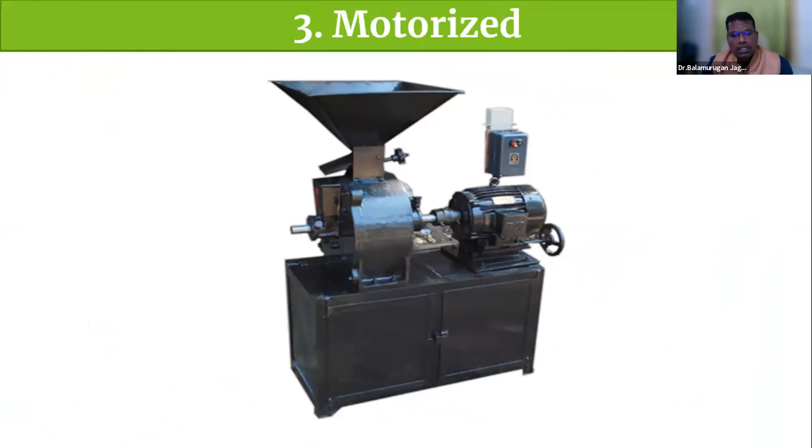So what is this? It was the earlier innovations and inventions that got attraction from common people to the modern world. This was updated with the wheel, which changed to slight automation, and going forward it was motorized. We could see that the process industry has made it possible to prepare chapatis or puris within seconds, and now full-time automation is possible.

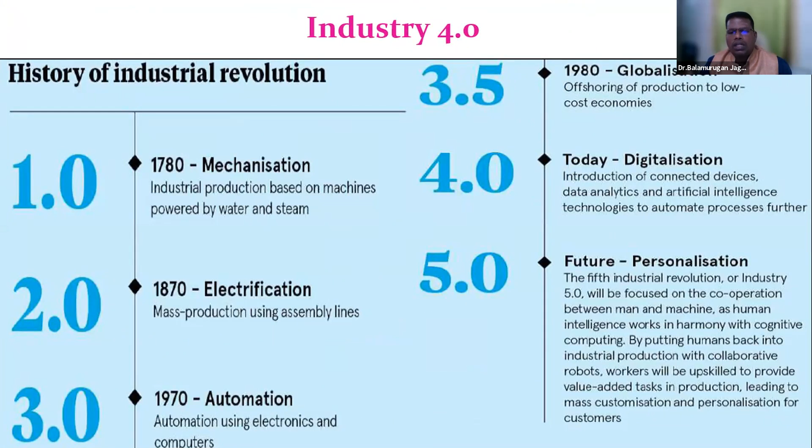Yes, it is about the history of the industrial revolution: 1.0, 2.0, 3.0, 3.5, 4.0, and now it's 5.0, which is about personalization. No more TV channels—it's about personal TV channels we have, as well as the mobile. So all the people talking around are talking only to their mobiles because they don't have friends or relatives, I don't know, but they are sitting alone in the park talking with the mobile.

That means automation. Automations can be done through a lot of steps, but there is a sustainable outcome which draws all the engineering platforms integrated to IoT. This is called the Internet of Things.

Technology-driven education—new technologies evolve at an exponential pace, and there is no historical precedent that marks the beginning of this evolution, hence being called disruptive technologies, which are ruling right now. I could see artificial intelligence, AI, robotics, Internet of Things, autonomous vehicles, bio and nanotechnology, 3D printing—all such information is top notch, yes, it is top notch. Every individual needs to have knowledge about this disruptive technology.

This is excellence in engineering. That brought about automation—what's the need for automation in an industry? Is there a need, or can I go ahead with ordinary machinery? Meaning, I could not compete with the common world.

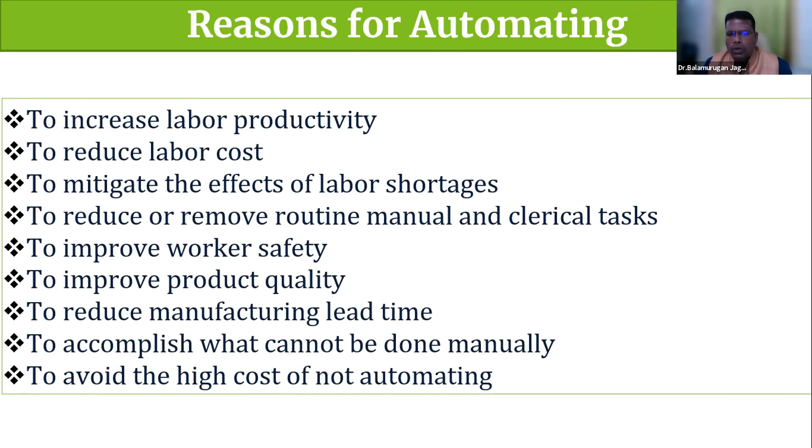Automation increases labor productivity, reduces labor cost, mitigates the effects of labor shortage, reduces or removes routine manual clerical jobs, improves worker safety, and improves product quality. All these add up to what needs to be done, and this can be achieved through a smart world.

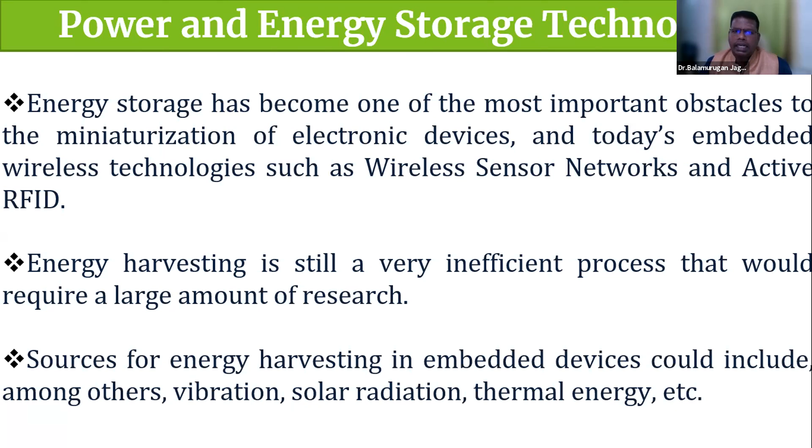A smart watch is there, smart operation is done, smart computer is there, smartphone is there. Why not the world can have all such things, meaning smart meters are going to come in electricity boards. You can switch on and switch off, and time-of-day meters are going to be integrated with smart metering. So all such things are going to be with IT and OT, information technology and operational technology, going to be integrated.

But we also have a thought process to do justice to the world, meaning we need to have a sustainable world, a green world. So whatever we are seeing, is it a myth or an illusion? We need to work on it. I will just think about it, and I'm here to talk about only the visualization part.

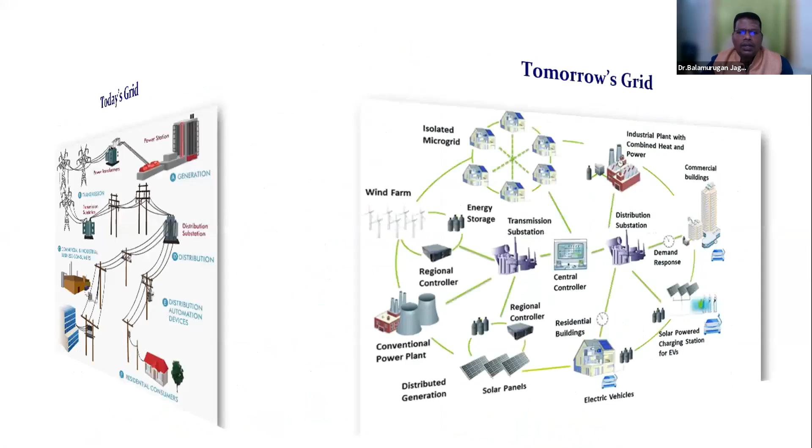Going forward, today's grid is a layer or linear integration, but tomorrow's grid is going to be an integrated outcome. That means the isolated world is going to be integrated with every part. Today we could see that no more electricity is being tapped from the grid, it is all self-generation, meaning every individual wants to generate their own.

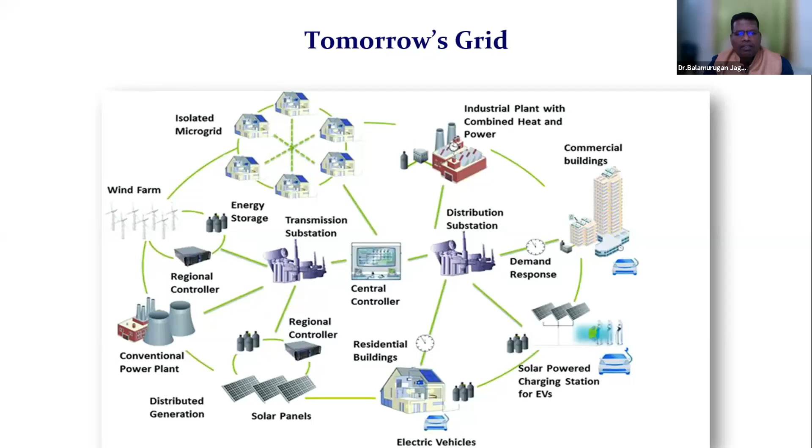And the power generation is also distributed. Earlier it was only with coal, and now we have all the alternatives. So a lot of energy is coming from different formations, but how it is being distributed is about energy conservation. One of our co-panelists has vast experience explaining about it.

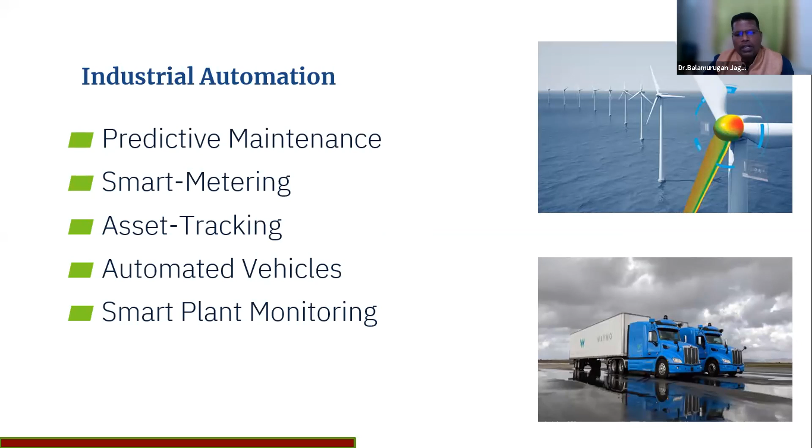So we'll go ahead and see what is automation and how things are working on. It is about industrial automation - predictive maintenance, smart metering, asset tracking, automated vehicles, smart plant monitoring. All these are categorized under industrial automation, meaning we need to focus on how things are working.

So the concept here is about Industry 4.0. It is about the manual process which is being digitalized, and this digitalization leads to automation, and automation leads to connectivity, which is production engineering. So it is about the connected world and the data, which is very valid.

Internet of Things, cloud, big data, and artificial intelligence are going to be connected with a mobile. So an Enfield which costs 1.8 lakh rupees is equivalent to an iPhone which costs the same. So whoever buys it, the denomination doesn't matter because the value is very important.

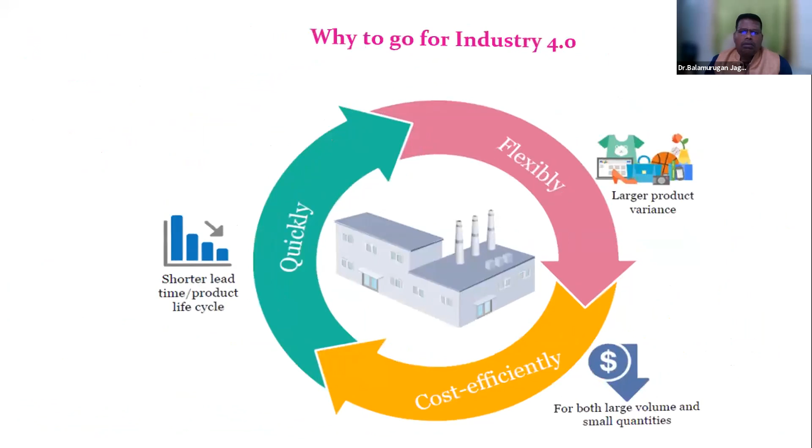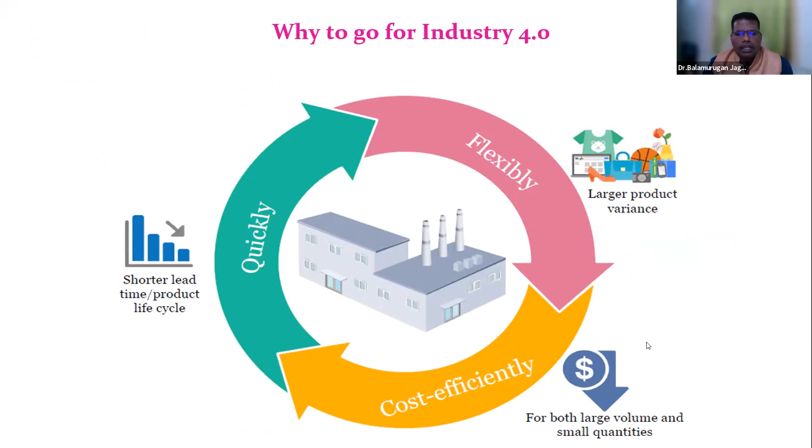So going forward, how are things going to be there? It's about quick flexibility, and it's going to be oriented with us, as part and parcel of our life. It is going to be cost efficient for both larger volumes or small quantities, and it's also going to have short lead time.

I had a video which would be showing up, but if time permits later we can discuss about it. The production earlier was only for customers, but now we could see that Pepsi or Coca-Cola are coming from a single plant in a smaller FSI itself. That means industrial automation has brought different kinds of bottling systems or process chain management.

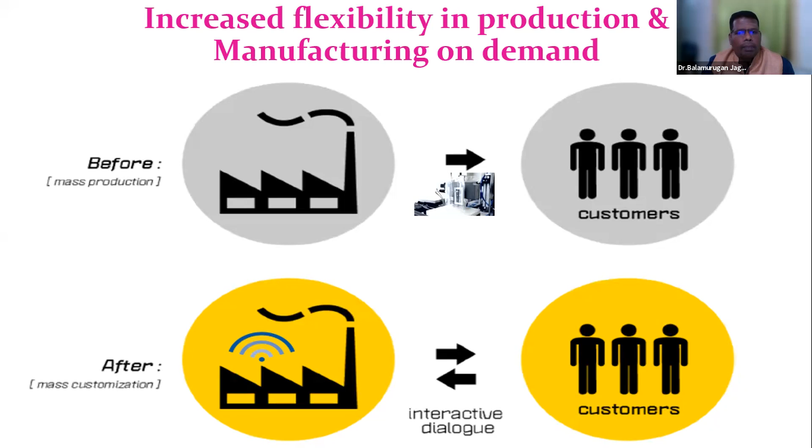That is achieved through Industry 4.0, meaning IT and operational technology has integrated with all such gadgets and frameworks. This has brought the Internet of Things to work on. So the Internet of Things - what is that? The myth word which is being talked about in the town.

So it's a network of physical object devices, vehicles, buildings, and other items embedded with electronics, software, sensors, and network connectivity that enables these objects to collect and exchange data. So it is going to be the collection of data, that's what data science we are talking about. Yes, it is everywhere.

We could see that it started from Arnold Schwarzenegger with a movie, but right now every movie is a sci-fi movie. Whichever comes in Hollywood, it's sci-fi, but even in Bollywood or Kollywood, we could see that all the movies are sci-fi. That means sci-fi is being connected everywhere, and we could see that everything is connected. We could see that 20.5 billion devices are connected and expected to grow further, going to be 1.9 trillion IoT devices connected.

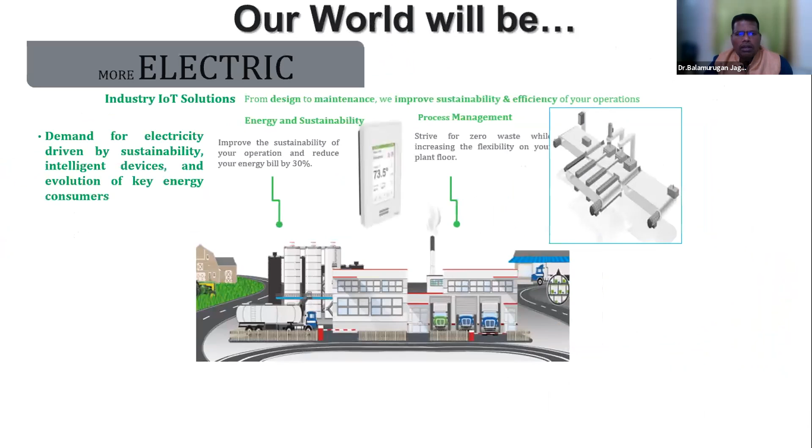So what's the myth there? So it's no more myth. It is a part and parcel. It is going to be more electric, more connected, more distributed, and more efficient. So that is very much important. So it is going to be more efficient means we need to think about the nature.

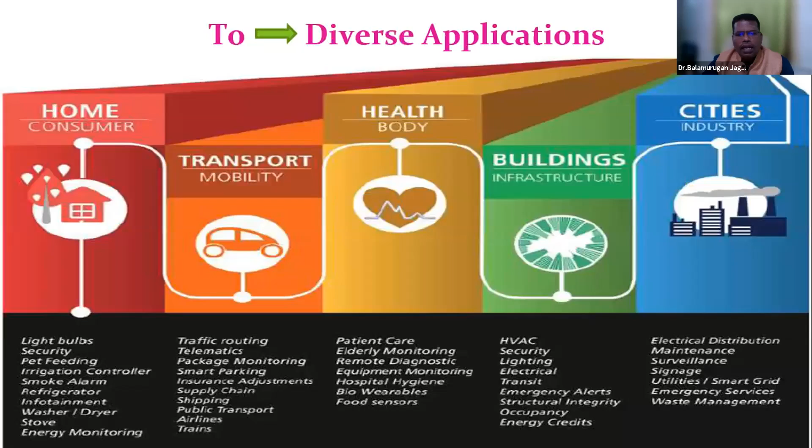So the primary objective can be achieved through these technologies. RFID is the primary sensor, which is connected through Wi-Fi IEEE 802.11, starting from A to G, or a barcode or QR code that is part and parcel of every Swiggy or Zomato. Zigbee IEEE 802.15.4 is the network which can work on smaller areas. Sensors and smartphones play a vital role in connecting everything.

We have a famous quote from Steve Jobs. He's a pioneer - I was talking about the iPhone. He always says: 'It doesn't make sense to hire smart people and tell them what to do. We hire smart people so they can tell us what to do.' That is the outcome that the iPhone has come up with.

So the future education industry would be integrated with robotics, UAVs, AI, singularity. It is about quantum computing, which is the talk of the town right now. It's about UX and UI - user experience and user interface can be connected with an API, where we have Android stores with a lot of applications available.

Going forward, it is about digital currency - we talk about blockchain technology and cryptocurrencies that are coming up, and we are about to have all such technologies. Going forward, the technology which is going to be the talk of the town is about complex problem solving, critical thinking, creativity, people management, coordinating with others, emotional intelligence, judgment, decision making, service orientation, negotiation, and cognitive flexibility.

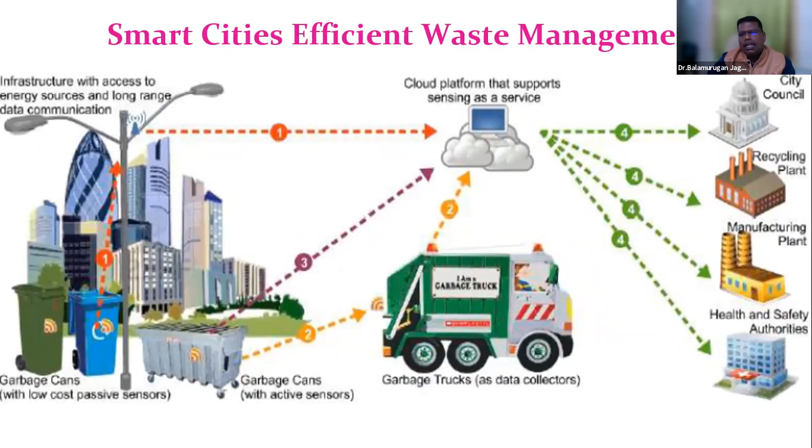We also have smart cities where all the trucks, garbages, and everything is being connected with IoT devices. We could also see Holy Cow, which has been connected with sensors that give a lot of data - how cows are organized, and we could also get the data. Every day we get 200 MBs of data from a cow to help increase milk or meat, whatever it may be. So everything is there.

So the data is very vital. We could see Google, which is exposing a lot of things, but only certain areas are being listed in Google. Much of the data is unavailable, only the tip of an iceberg. So this gives a clear-cut idea of what is data and how things are working.

So we could also see the Internet of underground things. A lot of things are working on this. I'm just thinking about the time and other things.

I'm just moving on with a slide to say that Internet of battlegrounds, the drones are ruling already. In Jammu Kashmir and other areas, now Afghanistan, a lot of drone technologies are there which are ruling us, and ambulance and other parts of things are also working on.

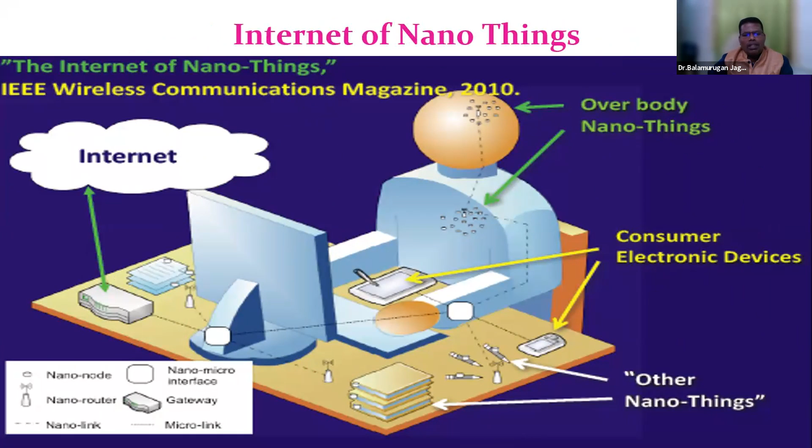Going forward, satellites would be interconnected with IoT and Internet of Nano Things. The IEEE devices would be connecting with pencil, pen, rubber, eraser, whatever it may be. Everything is going to be nano connected with IoT.

And a wonderful opportunity is telemedicine or teleoperation. Whatever things have come up is because of this IoT. Going forward, we would be mimicking ourselves, meaning the robot would be a symbolic representation of ourselves, where we can see the mirror. Everything is going to be connected.

So it is about the technology background. Anytime, any place, anything we could see is all the outcome. So coming to the point, excellence in industry is about being smarter.

Everyone in this world wants smarter, and we are smart enough to adjust with such things. Why not the power industry or the process industry could be updated? Already, 20 years back, Siemens introduced Industrial 4.0, and we are updating it on a regular basis, and we could see that the electrical company has made it with a smart grid.

And the health industry, which is booming like anything, is coming up with all such technologies about the smart watch or smart tracking. All such things have come up with smart health and a smart home, and a home area network.

Electric vehicles are going to be connected with a smart home, and your time of day metering is going to come up, where whatever we are switching on would be paid by the electricity board. It is an opportunity for the consumers to utilize the power.

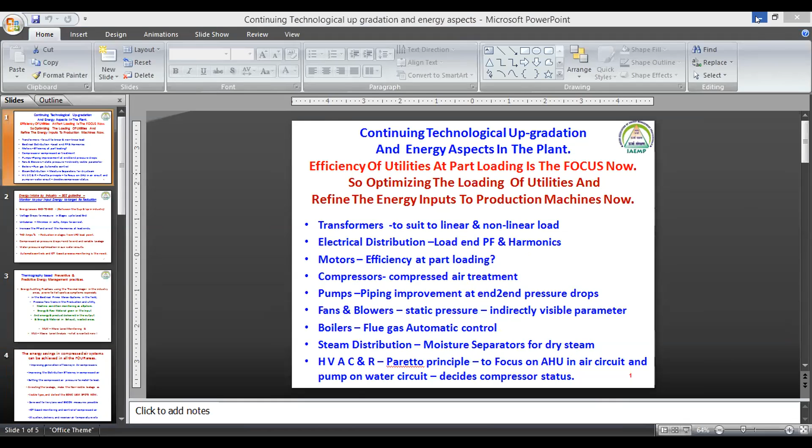Am I clear, sir? Yeah, now it's clear. Thanks for giving this opportunity to the Secretary and the President of IAEMP, and to the co-speakers for sharing their innumerous informative thoughts to the audience, and it is a wealth of information to us.

Now, basically, continuing technological upgradation, this is what we are talking about. I'm going to talk about plant engineering, to the plant engineers, and to the plant utility only.

Basically, in India or throughout the world, we can say the energy loss that is happening in all the plant utilities is around 20%. It is a macro view.

So if the efficiency of the utilities at part loading is focused on now, definitely this can be improved upon. So optimizing the loading of utilities and refining the energy inputs to the production machines and to the utilities, this is more important. This is where we are going to work on it now.

And to start with, all the utilities in the plant, right from transformers to electrical distribution to motors and other things.

See, transformer, if it is by the IS 1180, this one, the latest transformers, when it is catering to a mixture of linear and non-linear loads, automatically the loading is taken care of, and this is where improvement can be done on the transformers. Then on the electrical distribution, there's harmonics, especially on the non-linear loads, and power factor improvement, especially on the electrical distribution side, we are going to revisit the basics only.

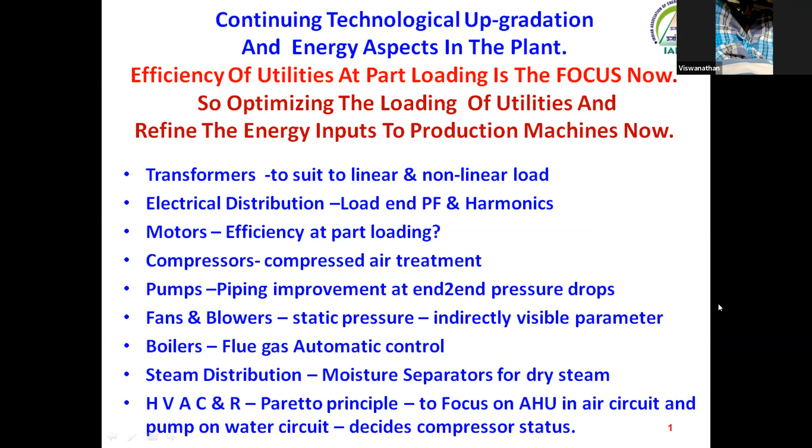Bureau of Energy Efficiency says only one aspect - what is the loss between the cup and the lip? This is where we are going to target - the energy losses happening end to end.

This is where this can be targeted, and the voltage drop that is happening in the plant - this will say whether the industry, especially the maintenance health of the industry, is healthy or not. These are all the symptoms of inefficiency that can be tracked upon.

Thanks to, in fact, our Balamurugan was suggesting a lot of IoT based things. The IoT based sensors and detectors and monitoring, everything can take this up, and will give a lot of inputs to the industry to improve upon this.

This is about increasing the PF at the load end and reducing the harmonics at load ends. Now the industry is targeting this more because the PF penalty, especially during COVID times, and the harmonic penalty, it is just booming now. It is going to come up again. So we can definitely target this.

As far as compressed air is concerned, the pressure drops are there. Compressed air is a dynamic process variable that is happening in the industry, especially in the utility. If this is taken care of end to end, and especially the variable leakages happening in the compressors are addressed, we can definitely have the compressor system - in generation, in distribution, and usage - efficiency sustainably improved.

Regarding water pressure optimization, especially on the water circuits, auxiliary water circuits, maybe on the cooling circuit or in the heat transfer circuit - if we are able to monitor the pressures across the heat transfers, across the exchangers, across the plate type heat exchangers, across the cooling towers, definitely the water pressure drop and water pressure optimization will improve upon the flow as such.

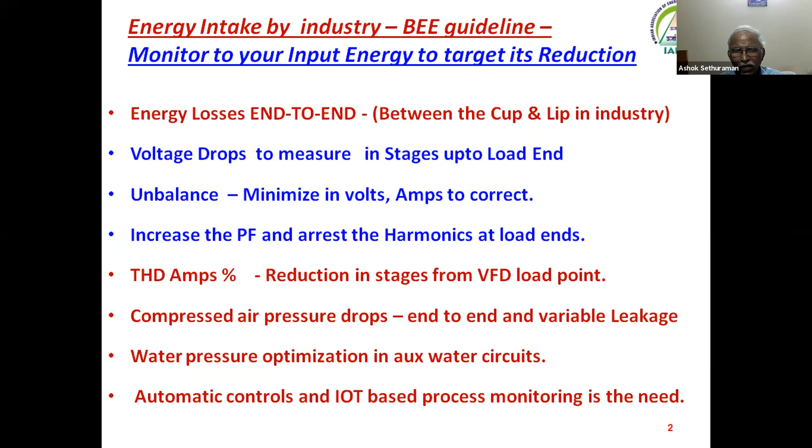So ultimately, for the given industry, continuous improvement, especially on energy conservation and energy efficiency, can be achieved by going for automatic controls and IoT based products, especially on monitoring. This is a more important thing that needs to be done.

Thanks to, I think, Dr. Mukesh Rai, who is going to dwell upon more on vibration monitoring. That is also very much important, but it is still in the nascent stage; that has to come up well in the industry.

But thermography has taken up in a very big way in the industry. In fact, wherever we go, thermography is already taking place in an excellent way. Throughout the world, in energy guzzling environments, engineers are using it.

The members or engineers are using it only on the electrical side. If we can concentrate the thermal imager there, maybe it gives a crude output, but it definitely gives a go-no-go effect, that is, where it is healthy and where it is not, it can definitely tell.

So the energy auditing practices using the thermal imager, especially in industry areas prone to hotspots as symptoms, this can be addressed, not only on the electrical prime mover side, but also on the process flow train.

I have been doing energy audits for more than 400 industries till date, and for the past 10 years we have been concentrating on using the thermal imager. It's a part and parcel of the energy audit, which gives a lot of inputs.

Wherever there are warm spots or hotspots, that is a symptom of inefficiency, not only on the energy flow as per the Sankey diagram but also on the process flow in the industry. This can definitely be touched upon, and it can be further improved and researched upon.

So this thermal imager can be used not only for machine condition monitoring, but also on the raw energy and raw material process movement, as well as the product delivered to the market at the output, and the energy and material going as exhaust.

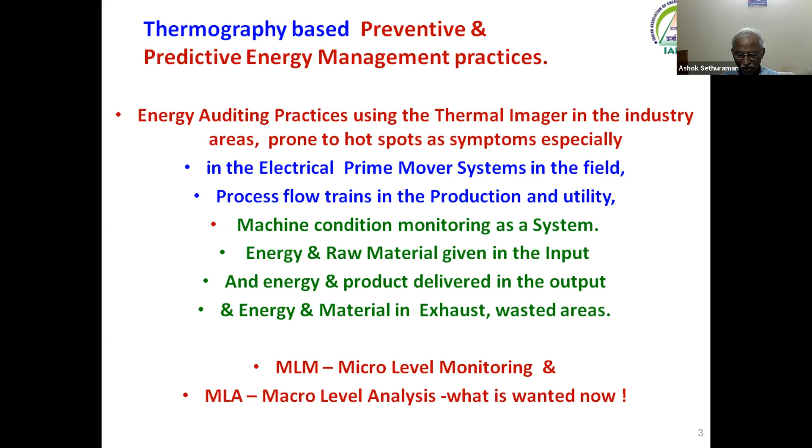Coming to say, I'm just touching upon the different areas of utilities where the compressor is a main area in many industries, where we find the generation efficiency is at a loss.

From 150 watts per CFM, many industries are operating at 250 watts per CFM. This can be improved upon at the generation side, especially in the compressor house.

At the distribution efficiency, you have to see to it that the two receivers are working in tandem, one for the control of pressure towards the compressor side, the other towards the demand for the process side. Arresting the leakage, this is the non-visible leakage.

Now sonic imagers are available. In a short time, in a day's time, many of the leaks can be spotted. This is the shortcut to achieve energy savings, especially in the compressed air utility.

So IoT based monitoring, especially on the control of process compressed air, especially on the compressor receiver air temperature, and we can also monitor the suction air intake temperature. We always think it is free air delivered to the suction of the compressor, but it is not so.

It is totally starved. This can be controlled upon, it can be monitored, and it can definitely be reduced further to achieve overall energy efficiency.

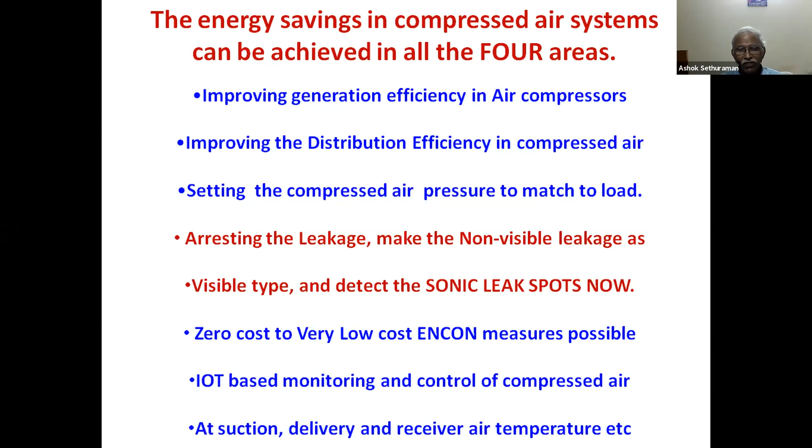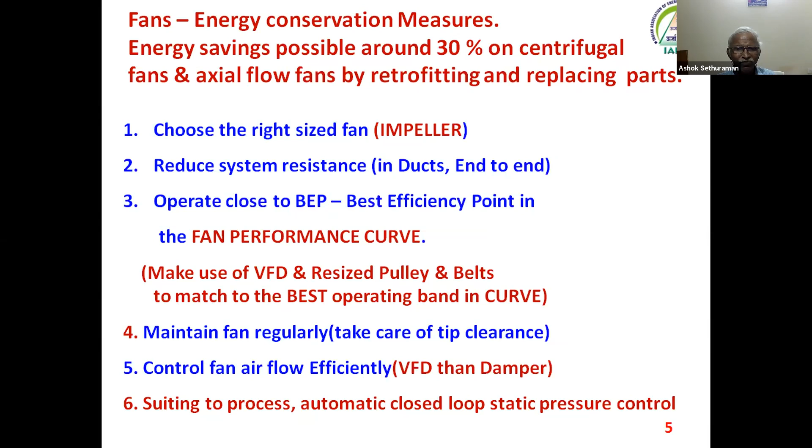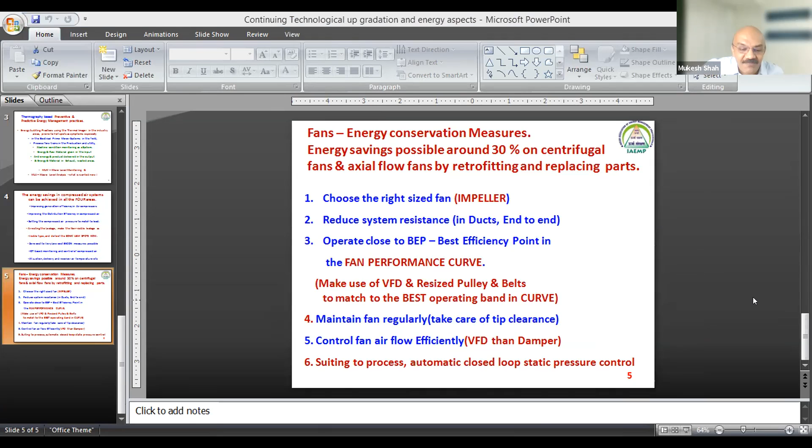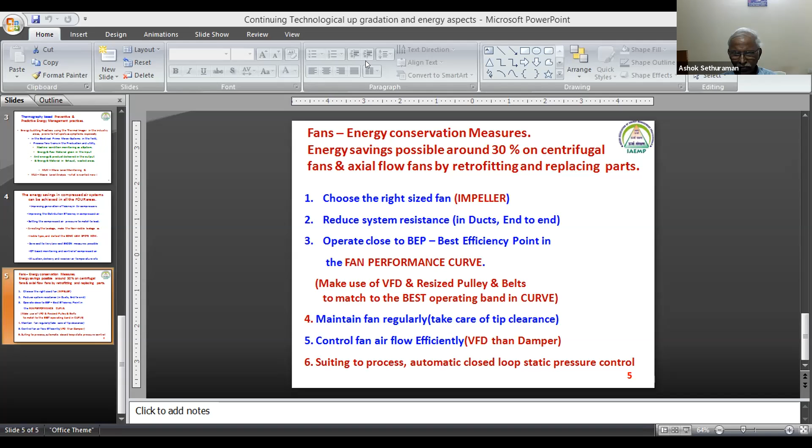Hello. Hello. Hello, hello sir, Mr. Mukesh Shah please. Yes, please. Yeah, you too. Thank you. I'll share my screen. Ashok, I think—yeah, I'm just switching off. Yeah. Yeah. Okay.

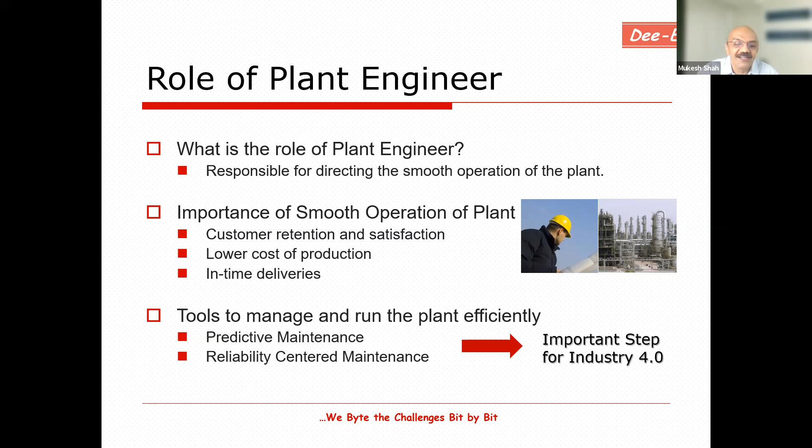With a lot of technology available, it is possible to do that. And it's a very important step towards Industry 4.0, which is basically smart manufacturing. This is what really facilitates doing that. So I will be quickly showing what are the possibilities.

So basically, when you say predictive maintenance or reliability-centered maintenance, what you are talking about is maintain only if needed, and predict the health of the production machine. This will help you run the machine smoothly. That is, you will not have unprecedented breakdowns. You will maintain the machine only if required.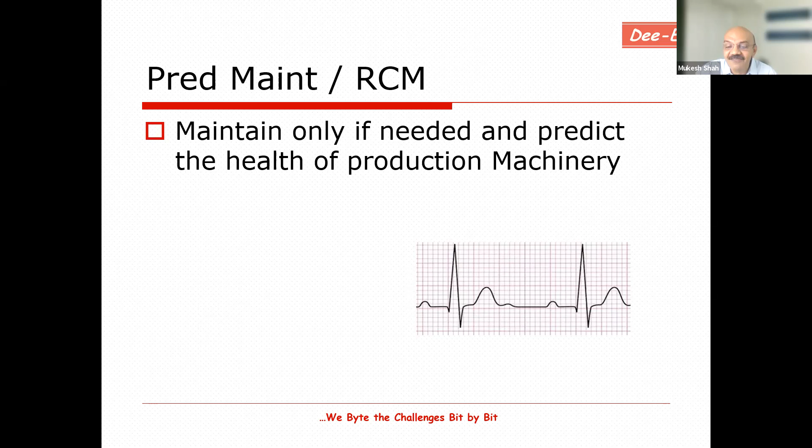It's just like monitoring your heart. You monitor it, but you don't maintain it unless it is really required. So only if you have a problem, then you maintain your heart. Otherwise, you keep watching it, keeping it healthy, without really stopping to open it and check out what is wrong. Similar with machines: run the machine, monitor it, and maintain it or shut it down only if it is really necessary, to minimize your shutdown time.

One of the technologies very popular for this is vibration monitoring. When I started my career, it was more like a vibration meter, maybe an analog meter, with manually tunable filters to give you some frequency idea. But things have changed completely over the last 30 years.

Today you can find an embedded vibration analyzer which could have information that there is a bearing defect, a kind of wear of the bearing. And what is the confidence level of this machine to say that yes, it is a bearing defect? Or if it is unbalanced, what is the confidence level? My confidence level is, let's say, 75% that this is a problem of unbalance. You can directly see this right on your screen.

As earlier speakers talked about smart technology, artificial intelligence is kind of built into these kinds of boxes. Or, of course, it can be further networked together to share the information, either company-wide or even with other companies and things like that.

Things are changing so much that this can be done very easily by an engineer who is just basically trained on how to use the equipment, and he can do a lot of meaningful analysis of what is going wrong with the machine, or how long before a shutdown is needed. Then I can use this time to order my spare parts so that they come just in time. I don't waste money stocking spare parts, since I can use this lead time and then maintain my machine. Such tools are available today, which can be very well utilized, and I'm sure many industries are already using them.

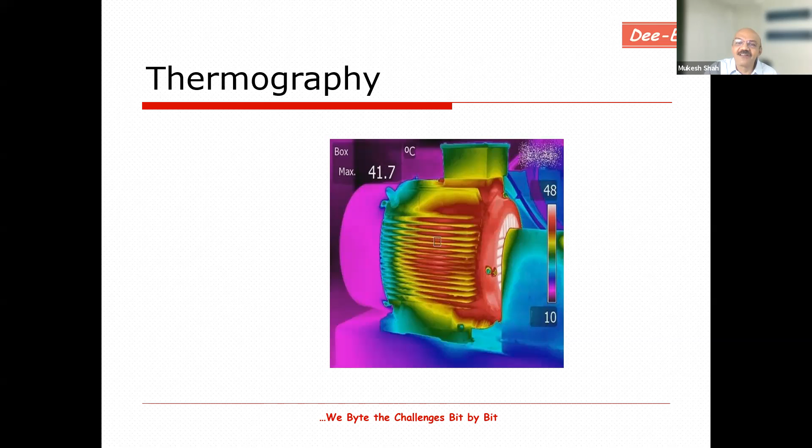Wear debris analysis: basically, as blood runs in our body, more or less every rotating or reciprocating machine has oil lubricating it. If you analyze this lubricating oil, you can get a lot of information at a very incipient stage. For example, aircraft oil is analyzed after a certain number of flying hours to find any particles traced into it. From this, the condition of the engine and other machinery of the aircraft are predicted, and repairs are taken up whenever needed.

You have a possibility to maneuver this tip after inserting it through a very small hole inside, let's say, a turbine. You can inspect all the blades without dismantling the turbine, and there are many such applications. So there are many such equipments available today which can be utilized for maintaining the machineries.

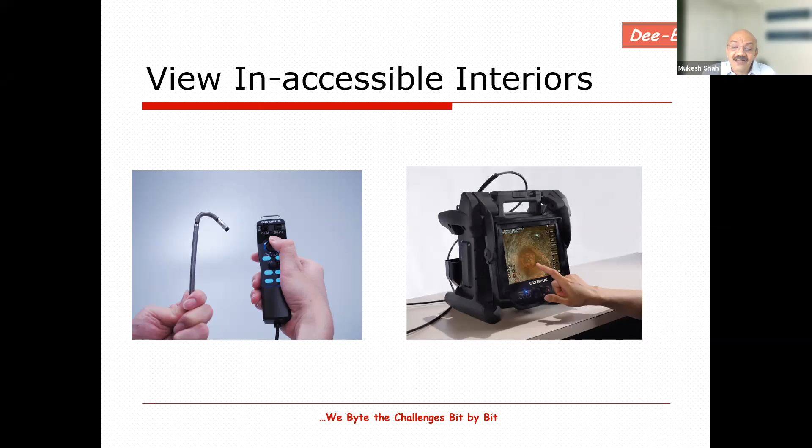And apart from that, as the first speaker, Dr. Pratibhan, had talked about, interaction of different professional institutions and the availability of different professional institutions to interact and share knowledge. So I would say, let's say, for example, Indian Institution of Plant Engineers.

I am a member of this institution since almost 1990, 91, and I've really found it to be so useful. I am primarily an instrumentation man, more of a communication and instrumentation engineer. However, I learned a lot about mechanical engineering, application of this instrumentation to vibration, condition monitoring, and things like that. I really thank the institution like Indian Institution of Plant Engineers for this.

Recently, this Council of Vibration Specialists has been formed in India. The objective of this institution is to share and guide the industry in the area of vibration monitoring on various types of aspects, not only rotating machines, reciprocating machines, even structural vibrations. Such institutions are there in India, and they have membership from various specialists who have academic experiences, who have industrial experiences. It will be really good to interact with them and enhance your knowledge and apply it to your industry.